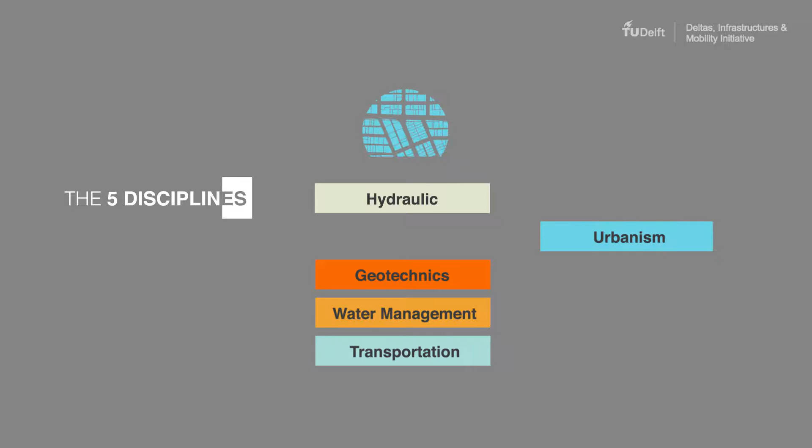Yuriage is in Tohoku, Japan, a region prone to frequent large earthquakes and tsunamis, and that has been struggling with the shrinking and aging population together with a declining economy for the last several decades. The reconstruction consists of the building of a coastal dike, which is the first line of tsunami defence, where also, through the implementation of spatial planning, residents were relocated from hazardous areas. The only rebuilding near the coast was for industries related to the fishing port.

Further inland, dikes were under construction along a canal to serve as a second line of defence against large tsunamis. The new residential area under construction further inland was made safe by elevating it by metres of land-filled earth. Public housing blocks doubled as vertical evacuation structures, whilst roads were designed to provide a straight route for horizontal evacuation.

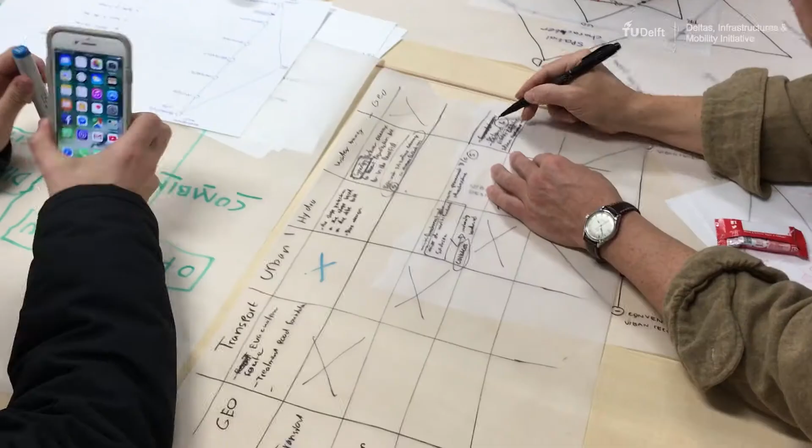By understanding, analysing and discussing the scope of reconstruction solutions from the point of view of each discipline, as well as in a team consisting of all 5 disciplines, methods for interdisciplinary working were tested, learned and experienced, and Japanese resilient solutions were applied to the Dutch case.

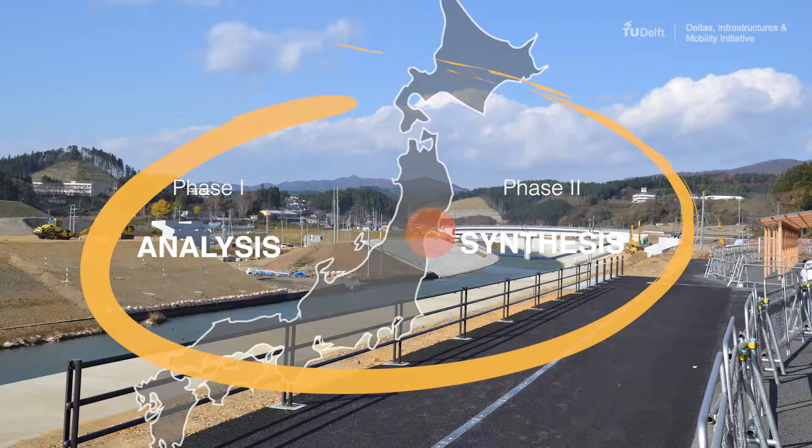The project involved 2 groups of students, an interdisciplinary project group and a group of thesis students. The big picture of the project was addressed by the interdisciplinary group in 3 phases: analysis, synthesis, and design. In the first 2 phases, the case of Yuriage was the starting point, whilst in the design phase, what was learned and designed there was transferred to the Dutch city of Vlissingen.

After preparation in Delft, a group workshop held at Tohoku University aimed to study how the reconstruction of Yuriage was planned and implemented, and to understand where different reconstruction methods are positioned through a charrette method. This interdisciplinary scope of possibilities is built up from the scopes of disciplinary possibilities that are brought together in the charrette.

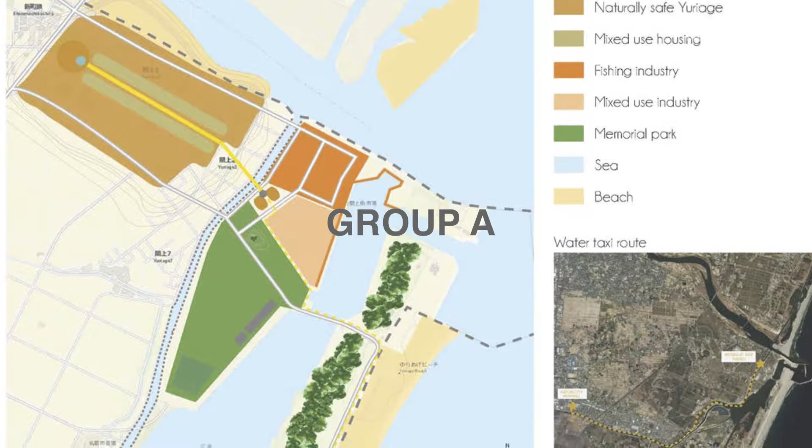After multiple rounds of discussion, the groups generated frameworks showing the linkages among the disciplinary scopes, which enabled the students to analyse relations among disciplinary decisions and to explain and assess the case from an interdisciplinary viewpoint. The frameworks were the base for spatial designs. Group A created a master plan for Yuriage based on 5 design criteria. These balance out multi-purpose and nature-based urban design with engineering intervention.

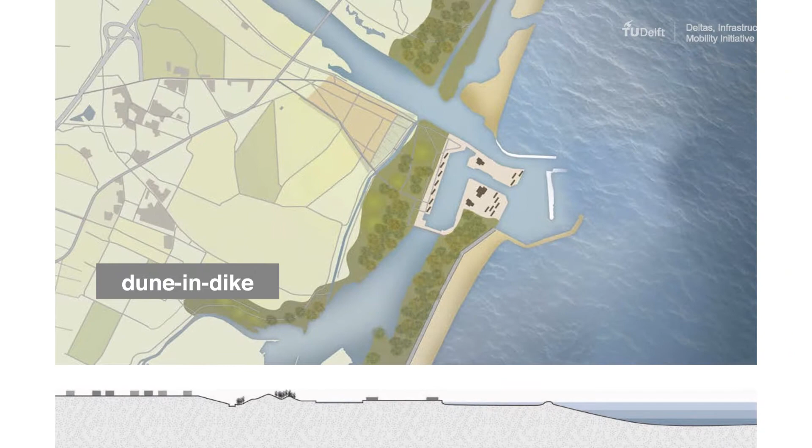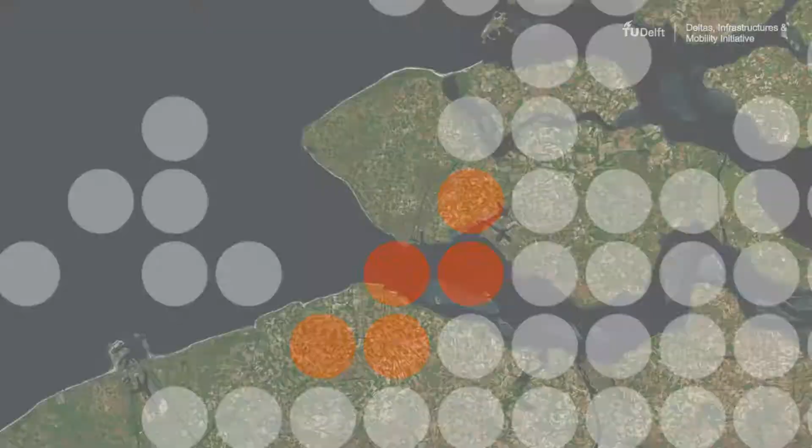Group B focused their design on using a dune-in-dike solution near the shore, where the dune system also functions as the base for a coastal forest, which is a traditional Japanese tsunami protection technique. The lessons learned from the tsunami reconstruction process in Yuriage were then applied to the Dutch context. Vlissingen was chosen because of its comparable location, demographics and economic issues.

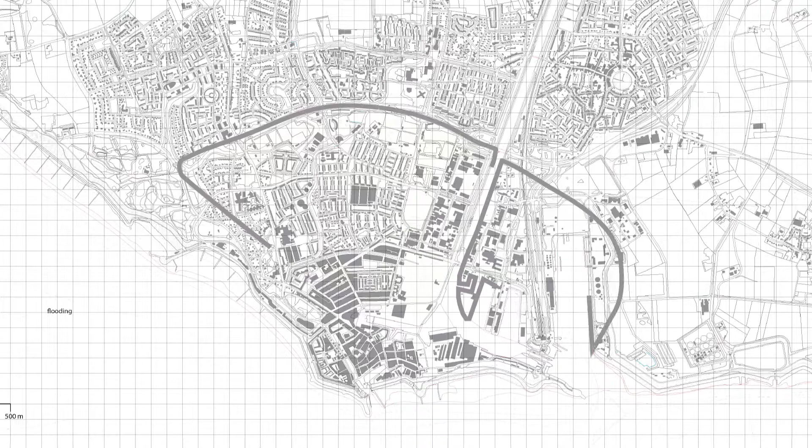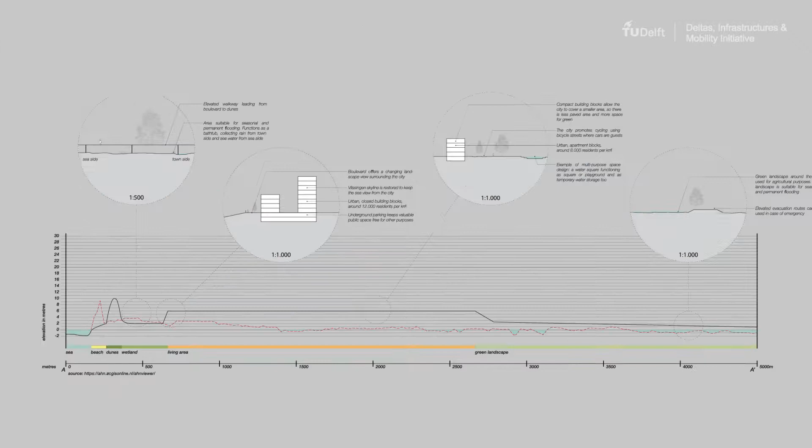To build back better, the whole group of students formulated 2 designs. Both incorporated multiple lines of defence as learned from Yuriage. Coastal dunes and dikes were combined with parking structures and promenades. Further inland, residential areas were physically elevated in one design, and in the other were combined with canals dug to lead floodwaters from storm surge or heavy rainfall to a sunken polder outside the city core. Road and rail transport arteries were designed to incorporate use for both daily life and evacuation.

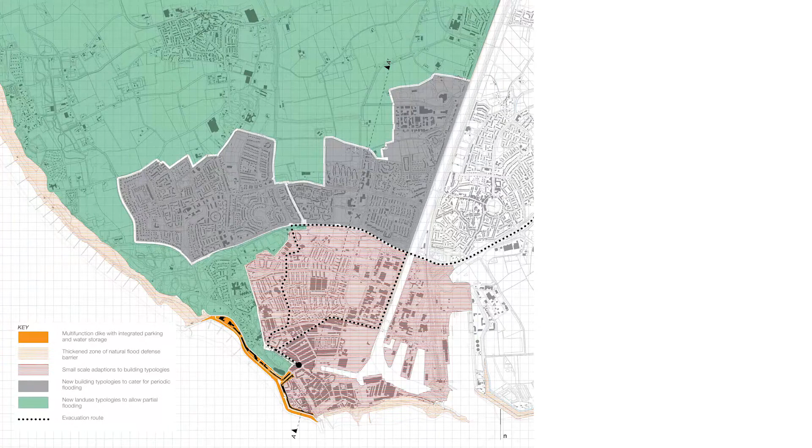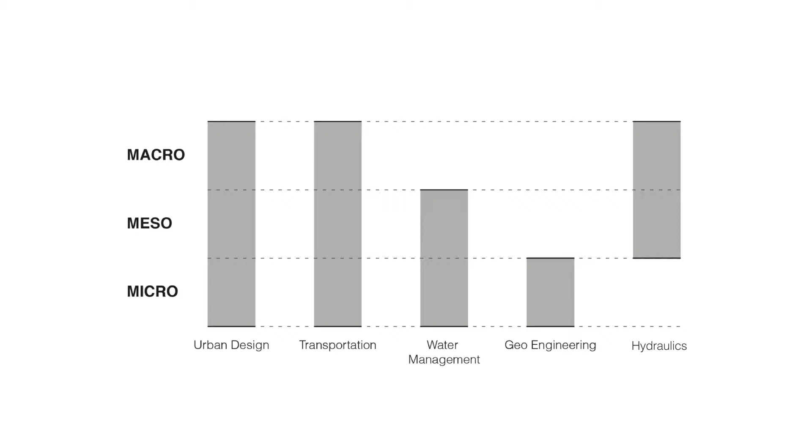These proposals were elaborated on by the interdisciplinary project group in an iterative process in which they would develop their parts separately and bring it together again in 2 steps. In addition to the big picture and detailed designs for Vlissingen, the group of MSc thesis students developed their individual thesis that addressed disciplinary topics in detail, but in the context of the other disciplines.

To make the tsunami reconstruction of Tohoku more resilient, the Dutch approach of regional design is tested. This approach balances out the local qualities on the larger scale and reinforces them on the smaller scale. For this scale, 3 urban designs are made: for a tsunami mitigating riverbed, renewable energy plan, and the development of a transit-oriented design location.

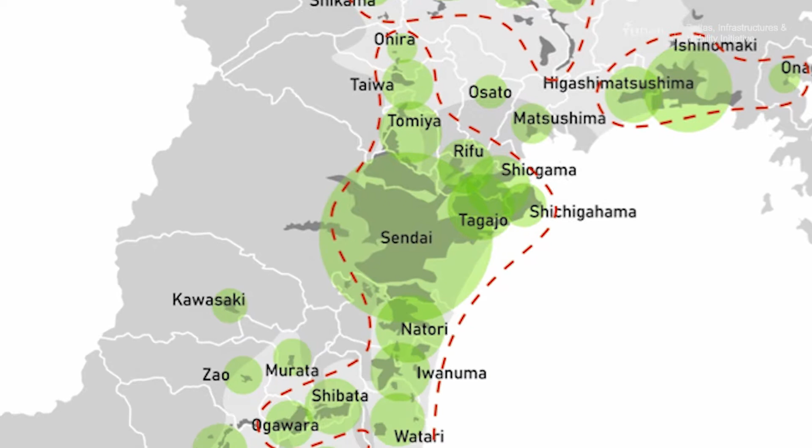The TOD is part of the transport and planning thesis, in which a regional transport design is made to respond to demographic changes of a shrinking and ageing society. Using a demand, transport and land use feedback circle, the design also integrates land use planning into the transport system, with the goal to be able to face an uncertain future with economic, social and environmental shifts.

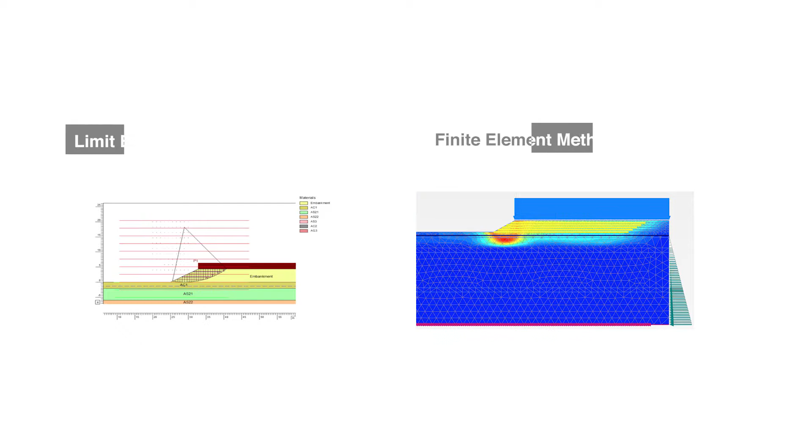The geoengineering project focused on the stability of geotextile reinforced slopes, with Yuriage raised area as the case study. Two methods were used for analysis, first using limit equilibrium method and second using finite element method. In Japan, a lot of concrete is used, and the application of geotextile could make these spaces less steep and multifunctional for ecological and recreational use.

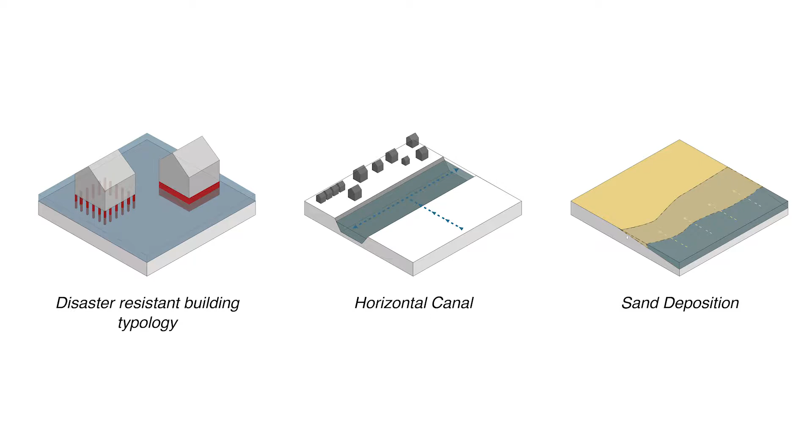The geotextile is also applied in the urbanism thesis, which takes the reconstruction of Yuriage to the level of modern urban renewal. This includes topics of water management and energy, and includes the introduction of spatial quality. To be able to qualitatively assess the tsunami resilience of a transport system, the first step is to deconstruct this concept into determining factors of tsunami resilience. This forms an assessment matrix that is also tested on Oahu, the most urban Hawaiian island.

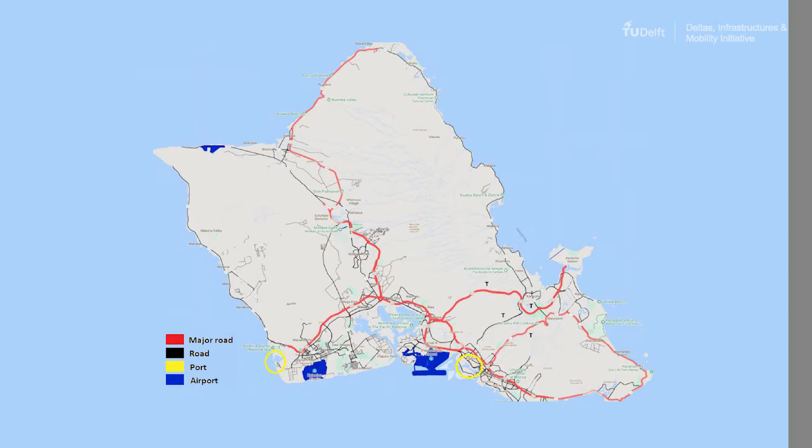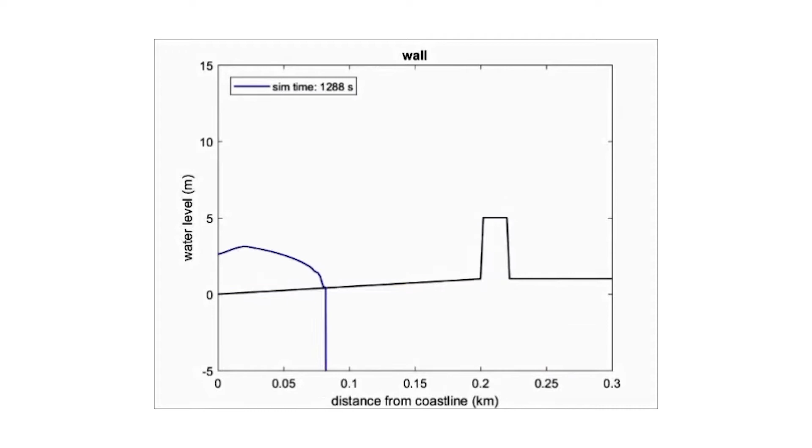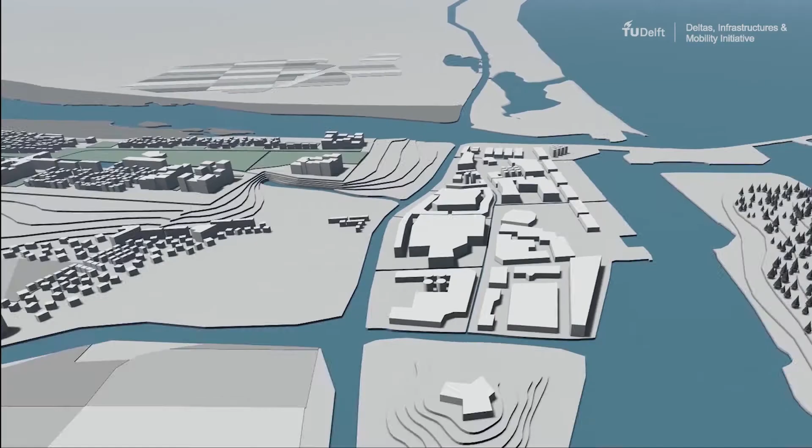The last project uses hydraulic engineering experiments and simulations of tsunami shoaling and run-up to optimize the effectiveness of coastal dikes and seawalls in mitigating tsunami damage. The project as a whole delivered a lot of knowledge about resilient design and how land use segregation, multiple lines of defense, and hard engineering methods from Japan could be merged with Dutch ideas of building with nature and multifunctional flood defense.

The group also trained in the interdisciplinary approach and discovered how the 5 disciplines can interact, especially by doing the same process for 2 locations. To be able to interact on a deep level, it turned out that scoping per discipline really improved the exchange of ideas in discussion and brings a solid base for the design of future resilient cities.